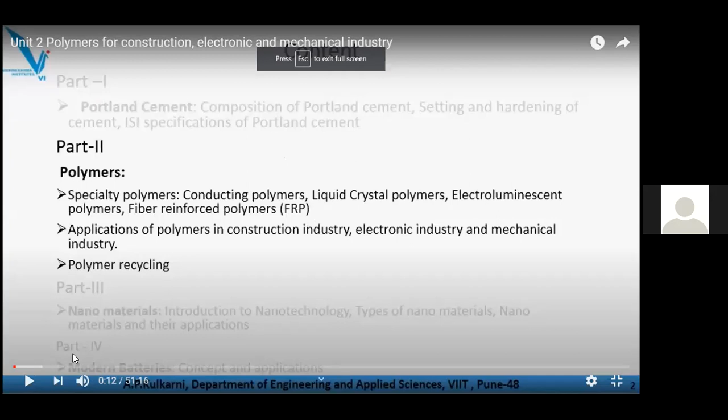Hello everyone. Welcome to lecture number 3 of Unit 2, Chemistry of Engineering Materials. Make it still louder. Just a minute, I'm doing it. This is our senior staff in the VIIT, Aparna Kulkarni ma'am. She has done this recording for everyone. Okay, chalo.

Hello everyone. Welcome to the lecture number 3 of Unit 2, Chemistry of Engineering Materials. We are going to continue our discussion on part 2, that is on polymers. In previous lecture, we had discussed about specialty polymers, that is conducting polymers, liquid crystal polymers, electroluminescent polymers, and fiber reinforced polymers. In this particular section, we are going to consider application of polymers in construction industry, electronic industry, and mechanical industry, along with polymer recycling.

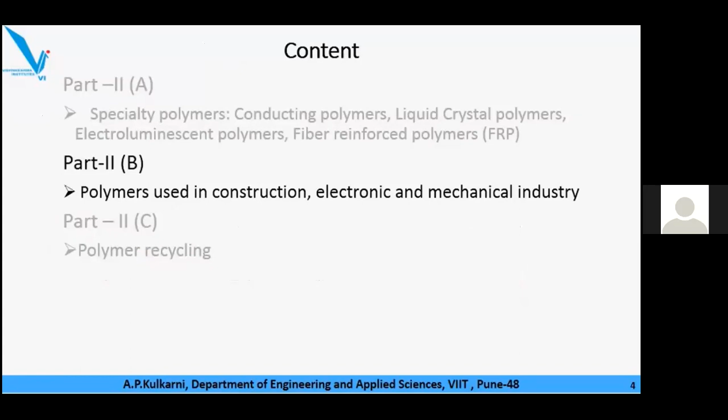So again, if you consider the objective, that is to understand the chemistry and relate it to properties and application. So here we are going to understand chemistry of polymers used in construction, electronic, and mechanical industry. Let's start with polymers in construction industry. Polymer and polymer composites are widely used in structural components in civil engineering fields, building construction, bridges, highways, and expressways, airstrips, helipads, railway, unpaved roads, etc.

The building and construction industry uses a variety of classic building material like metal, glass, wood, and stones. But plastic materials are becoming increasingly important due to their outstanding performance and excellent desirable properties like high strength, low density, and less weight. Construction applications of plastic include pipes and guttering, window and door profiles, roofings,

Excuse me, ma'am. What happened?

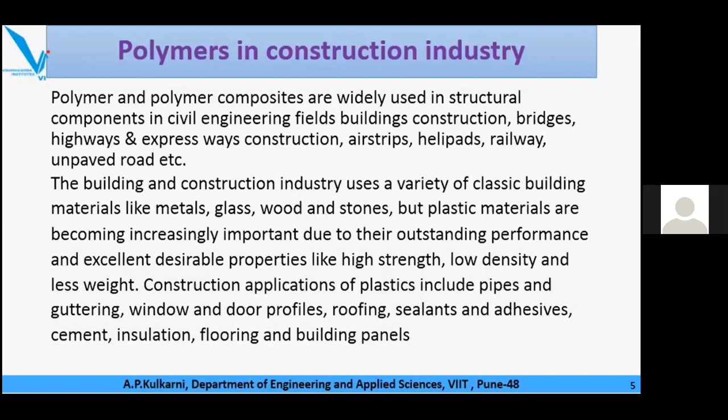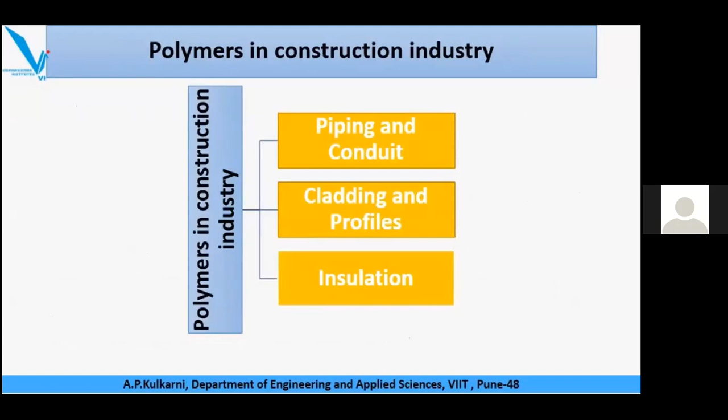Sealants, cement, insulation, flooring, and building panels. Although there are many applications of polymers in construction industry, we are going to focus on three, that is polymers used in piping and conduit, cladding and profiles, and for insulation. Piping and conduit are the largest users of polymers in construction and consume about 35% of production, producing cabling, rainwater goods, large diameter pipes for sewage, drainage, and potable water made from PVC and polyethylene.

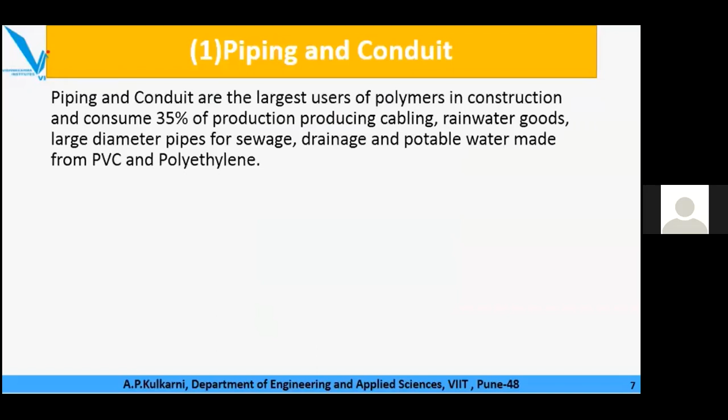So let us see PVC used for pipings and conduits. PVC stands for polyvinyl chloride. Vinyl chloride, that is carbon-carbon double bond with chlorine substitution, on polymerization will give polyvinyl chloride. Why can this be used for piping and conduits? That is because of their properties. The most important properties of PVC are superior fire retardancy, high ignition temperature, and relatively low heat release in burning. It has a high softening temperature, greater stiffness and rigidity as compared to polyethylene, but it is brittle. It presents strong resistance to oxidation, good chemical resistance to acids and alkali chemicals.

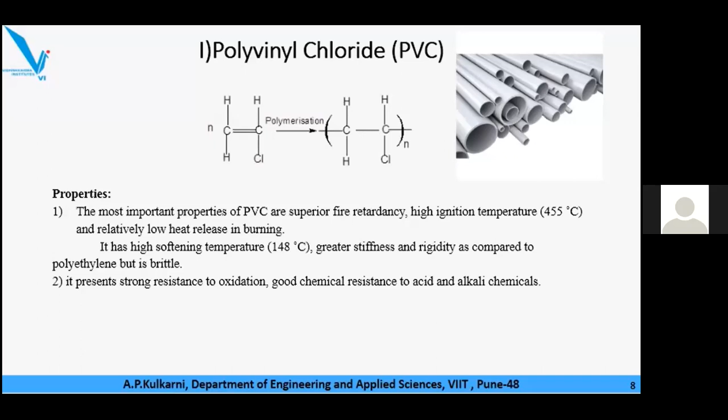Another material for piping and conduit is high density polyethylene, HDPE, where ethylene under low temperature, low pressure condition will produce high density polyethylene using Ziegler-Natta catalyst. Some of the favorite uses of HDPE include low pressure natural gas services, water distribution, and it is used as a lining material in carbon steel pipe. The following properties are responsible for it. High density polyethylene is highly resistant to chemical and corrosion. It has better tensile strength, higher softening temperature.

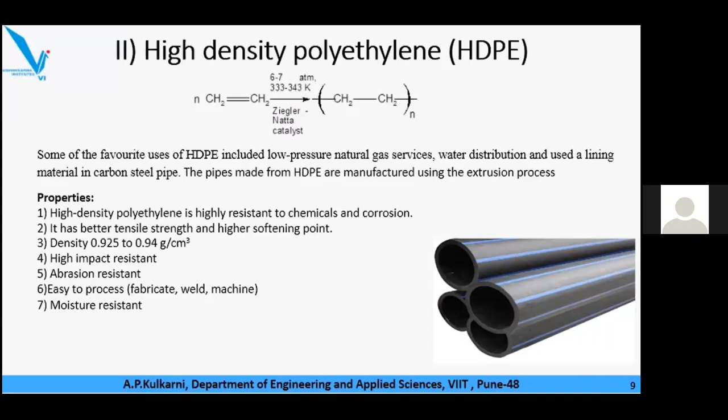The pipes made from HDPE are manufactured using extrusion process. Density is 0.925 to 0.94. High impact resistance, abrasion resistance, easy to process, fabricate, weld and machine, and it is moisture resistant.

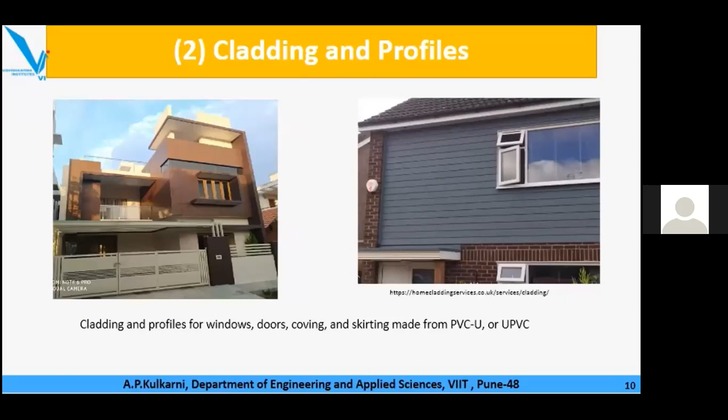Next major application of polymer in construction industry is for claddings and profiles. We observe many times that huge buildings and offices are cladded, and there are architectural profiles built using this plastic material. These claddings and profiles for windows, doors, coving, and skirting are made up of unplasticized PVC, shortly known as PVCU or UPVC.

PVCU or UPVC is called unplasticized PVC. PVC stands for polyvinyl chloride, prepared from polymerization of vinyl chloride. What is the meaning of unplasticized PVC? When these PVC polymer chains are prepared, they are linked to each other by hydrogen bonds. As chlorine is highly electronegative, there will be a minus delta charge on chlorine, and a plus delta charge on hydrogen.

Because of this partial opposite charge, you get a dipole attraction and formation of hydrogen bonds. So unplasticized PVC chains are held very strongly with respect to each other, and that is why we observe very good strength in this unplasticized PVC chain. This reflects on the properties of UPVC, which is highly chemical resistant and used popularly for both residential and commercial purposes. UPVC has excellent chemical resistance, which eliminates formation of limescale and provides good flow characteristics.

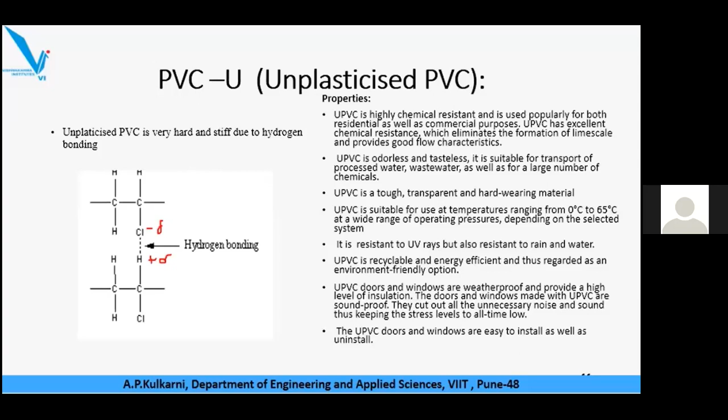UPVC is recyclable and energy efficient, thus regarded as an environment-friendly option. UPVC doors and windows are weatherproof and provide a high level of insulation. They are soundproof, cutting out unnecessary noise, thus keeping stress levels low at all times. UPVC doors and windows are easy to install as well as uninstall.

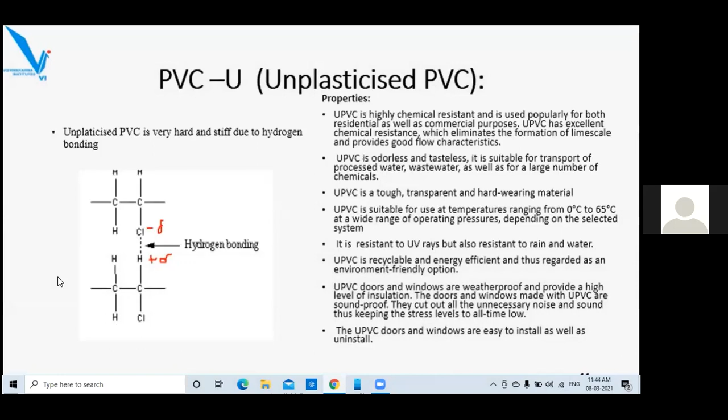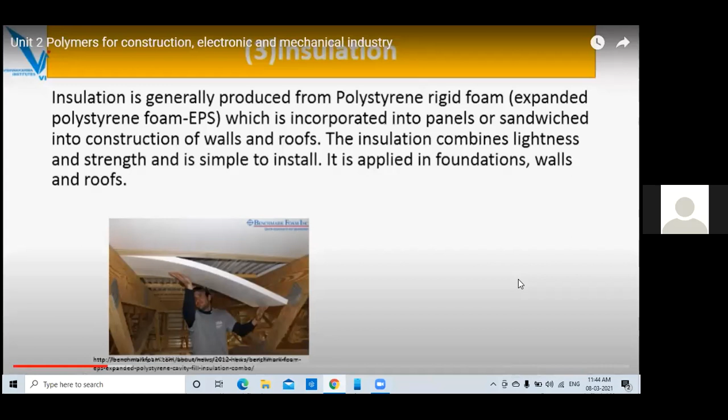Third major application of polymers in construction industry is for insulation. Many times we use galvanized iron sheets as roof sheets, and these get heated up in sun, increasing roof temperature very high. For preventing this, for heat insulation purpose, we use insulation sheets made up of polymer like polystyrene. Insulation is generally produced from polystyrene rigid foam, also called expanded polystyrene foam, shortly EPS, which is incorporated in panels or sandwiched into construction of walls and roofs.

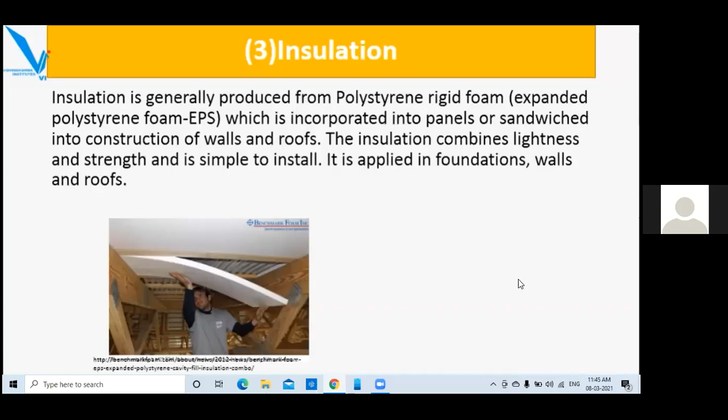Insulation combines lightness and strength, is simple to install, and enables constructors to meet energy conservation regulations. It is applied in foundations, walls, and roofs. Expanded polystyrene foam, EPS, is basically made up of polystyrene, which is prepared from the monomer styrene. Styrene is a carbon-carbon double bond substituted with a benzene ring, and this molecule on polymerization gives us polystyrene.

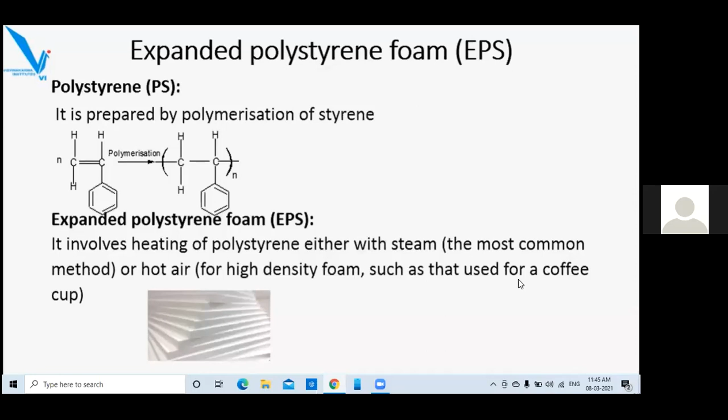What is the meaning of expanded polystyrene foam and how do we get it? This involves heating of polystyrene either with steam, which is the most common method, or hot air for high density foam, such as used for coffee mugs. This EPS foam is the most common in everyday life, seen as white foam in cups for hot beverages, refrigerators, insulation, packaging, etc.

The foam plastic consists of 96 to 98% air and 2 to 4% polystyrene. Granules are heated with steam such that they rapidly expand or foam, forming a low density block in a special form. Insulation foam EPS is used for a variety of applications because of its excellent properties, including good thermal insulation, good damping properties, and being extremely lightweight.

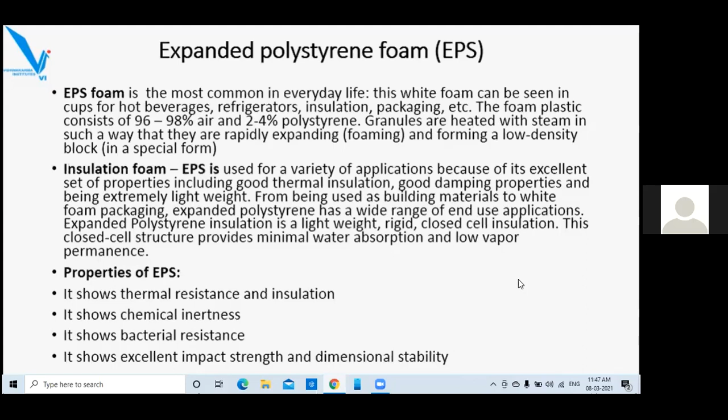From being used as building material to white foam packaging, expanded polystyrene has a wide range of end-use applications. Expanded polystyrene insulation is a lightweight, rigid, closed-cell insulation. This closed-cell structure provides minimal water absorption and low vapor permeance. Its properties include thermal resistance and insulation, chemical inertness, bacterial resistance, excellent impact strength, and dimensional stability.

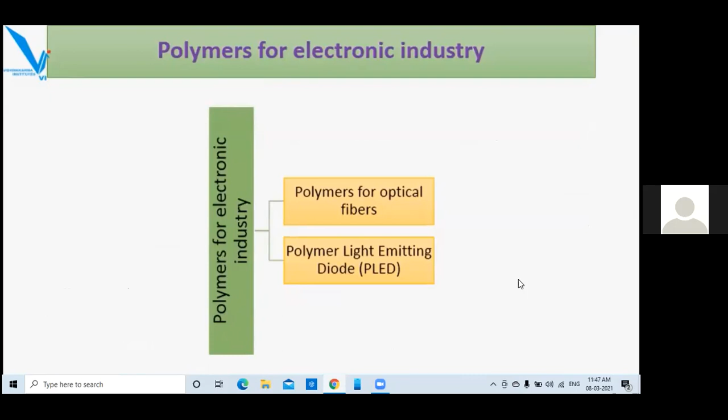Now let us consider polymers for electronic industries. In this category, we are going to consider two: polymers for optical fibers, and polymers used in light emitting diodes.

Let us consider the first one, polymers for optical fibers. In case of electronic communication, information was carried in the form of microwaves and radio waves through copper wires and coaxial cables. But the information carrying capacity of these wires is restricted due to limited bandwidth. If light waves are used instead of radio waves and microwaves, the number of signals transmitted can be increased enormously. Communication using light waves cannot be done directly, but requires some guiding media, normally optical fibers, in which the information carrying light waves could be transmitted.

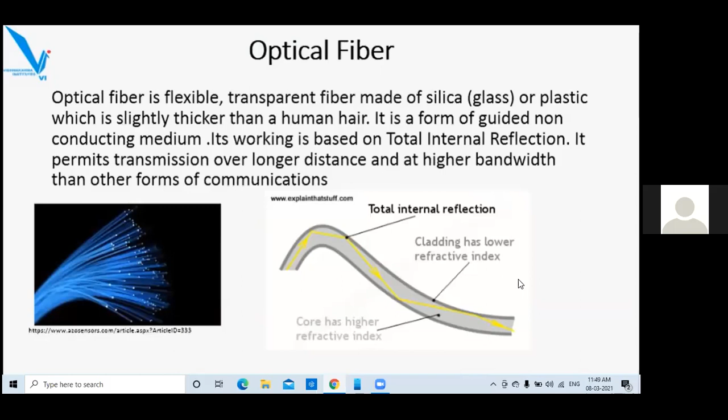Let us understand about optical fibers first. Optical fiber is a flexible, transparent fiber made up of either silica, that is glass, or plastic, slightly thicker than a human hair. It is a form of guided non-conducting medium. Its working is based on total internal reflection. You all have learned in physics about reflection, refraction, and total internal reflection. So in optical fibers, we have total internal reflection of light. That is the basic principle of working of optical fiber. It permits transmission over a longer distance and at higher bandwidth than other forms of communication.

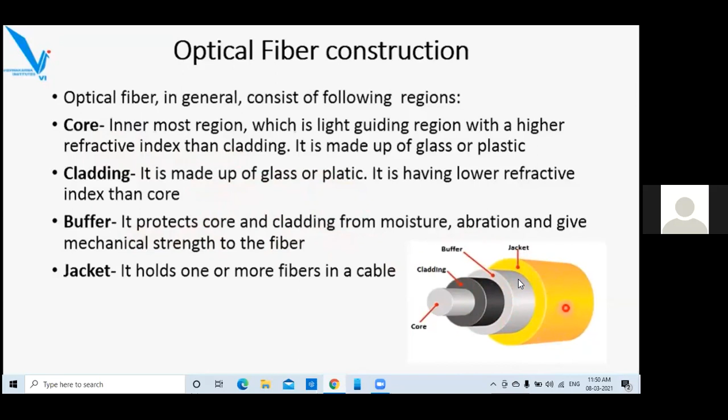Let us understand the general construction of optical fiber. It consists of core, cladding, buffer, and jacket. Core is the innermost region, which is the light guiding region with a higher refractive index than cladding. It is made up of either glass or plastic. Second is cladding, that is covering the core. It is made up of glass or plastic, and has a lower refractive index than the core. Then we have buffer, the third layer, which protects core and cladding from moisture, abrasion, and gives mechanical strength to the fiber. Lastly, we have the jacket, which holds one or more fibers in the cable.

Now let us understand about polymer optical fibers, shortly called POF. Polymer optical fiber is made up of polymer that transmits light for illumination or for data transfer. This light can be utilized through the polymer core. So in this case, the core of the optical fiber is made up of polymer. Polymer optical fibers are made up of low-cost plastic materials such as polymethyl methacrylate, shortly called PMMA, polystyrene, polycarbonate, with their transmission windows in the visible range, that is 500 to 800 nanometer. So it is extremely important that the polymers selected should be highly transparent and the transmission window should be in the visible range, ranging from 500 to 800 nanometer.

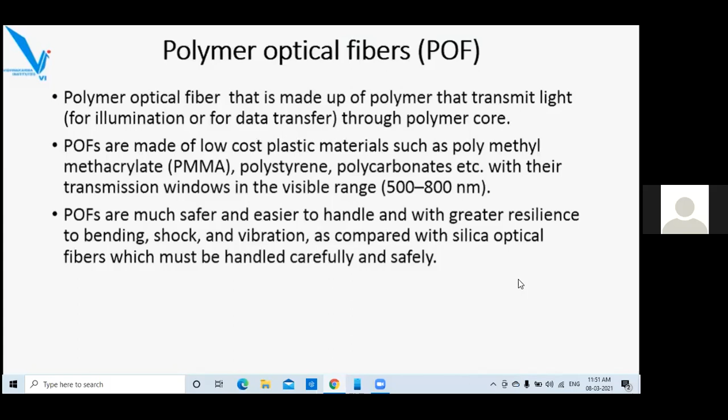POFs are much safer and easier to handle, with greater resilience to bend, shock, and vibrations as compared to silica optical fiber, that is glass optical fibers, which must be handled very carefully and safely because it contains a glass core. For long distance links where attenuation and dispersion effects are of prime importance, glass fiber core optical fibers are going to be superior.

However, polymer optical fiber is advantageous for short distance networks which are less concerned with attenuation and more concerned with flexibility, hazard-free handling, and low-cost installation. For short distance applications, multi-mode optical fiber with large core size is preferred over single mode fiber. Conventional multi-mode silica glass fiber cannot have a large core size because a large fiber becomes very brittle and inflexible.

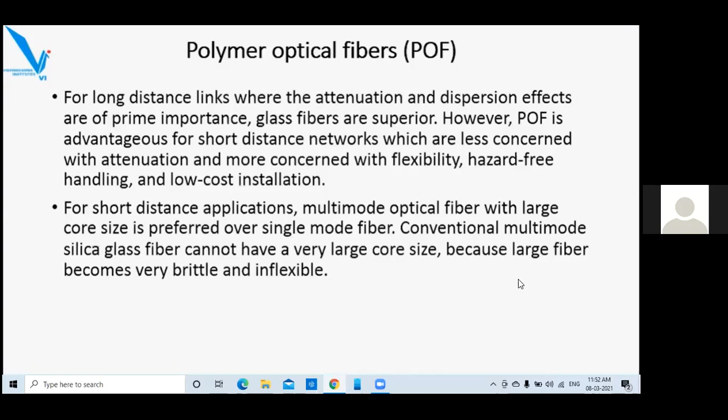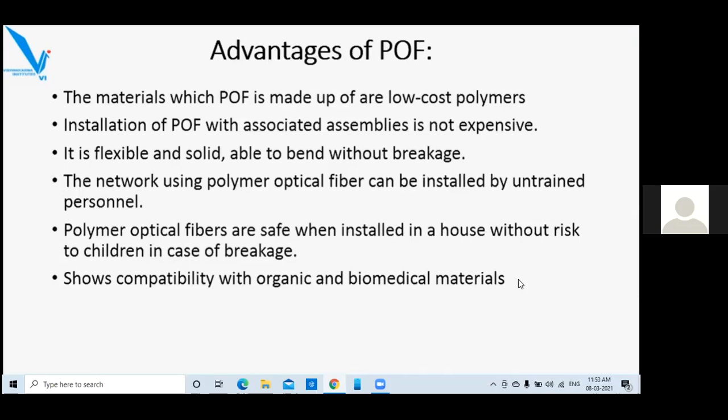So what are the advantages of polymer optical fibers? The materials which POF is made of are low-cost polymers. Installation of polymer optical fiber with associated assemblies is not expensive. It is flexible and solid, able to bend without breaking. Networks using polymer optical fiber can be installed by untrained personnel. Polymer optical fibers are safe when installed in-house, without risk to children in case of breakage, and show compatibility with organic and biomedical materials.

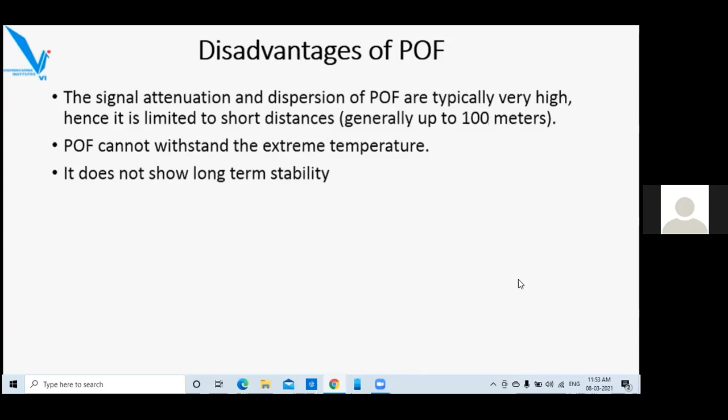At the same time, it shows certain disadvantages: the signal attenuation and dispersion of polymer optical fibers are typically very high, and hence it is limited to short distance, generally up to 100 meters. Polymer optical fibers cannot withstand extreme high temperature and do not show long-term stability. When it comes to applications of polymer optical fibers, it is normally used for lighting for decoration purposes, inspection of mechanical welds in pipes and engines, aeroplanes, rockets, automobiles, etc.

Medical applications such as endoscopy, bronchoscopy, laparoscopy, and communication use optical fibers. In communication, it is used for short distance network purposes. For sensors, it is used for optical measurement of flow. Biosensors measure fluorescence produced by biological activity, which is collected and transmitted by fiber.

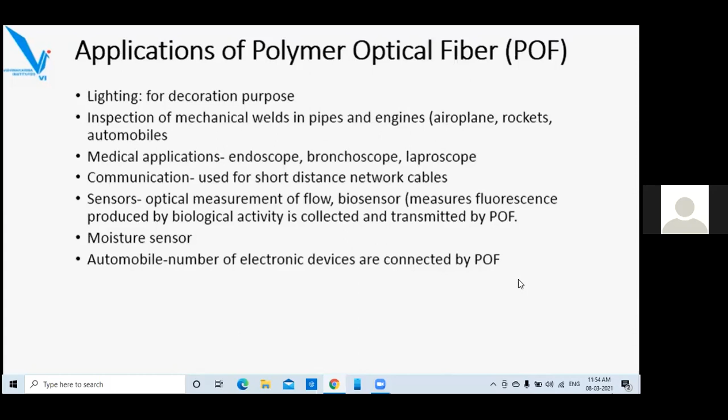This can also be used in moisture sensors. It is used in automobiles for a number of electronic devices that are connected by polymer optical fibers. If we compare these polymer optical fibers with glass fibers, then...

Polymer optical fibers are less expensive, while glass optical fibers are more expensive. Polymer optical fibers cannot sustain extreme temperature, whereas glass can sustain higher temperature. Polymer has better signal strength, whereas glass fiber has poorer signal strength.

Polymer is used for low speed, short distance applications, whereas glass fibers are used for longer distance transmission with higher speed. Polymer optical fibers are used in car networks, home networks, and industrial networks, whereas glass fibers are used in underground data transmission systems.

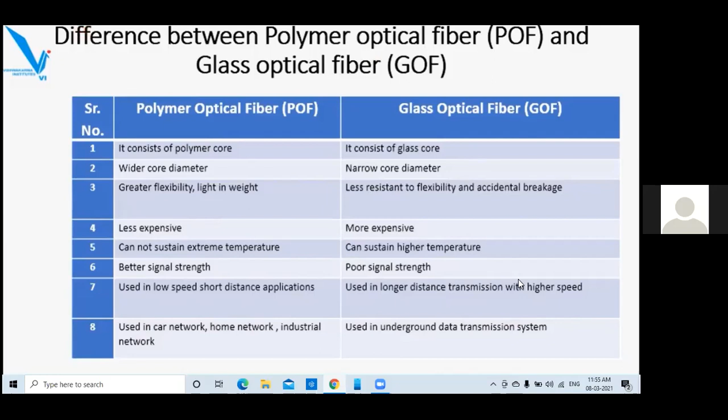So major networking is done by glass optical fibers, but when it comes to household networking systems or industrial networking systems, we can make use of polymer optical fibers, which are safer to use, can be easily bent, and have less accidental injury chances. So after looking at what optical fibers are and how differently the materials can be used, let us understand the materials used in the core material of polymer optical fibers.

Materials used for polymer optical fibers should have the following characteristics. Number one, it should be clear plastic with good optical transmission quality for efficient optical transmission. Number two, it must be flexible and must be able to be drawn into long fibers.

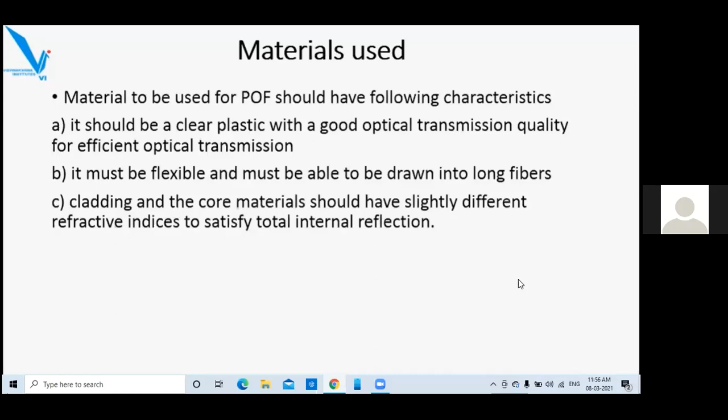Number three, the cladding and core material should have a slight difference in refractive index to satisfy total internal reflection. Let us consider the first material, polymethyl methacrylate, shortly called PMMA.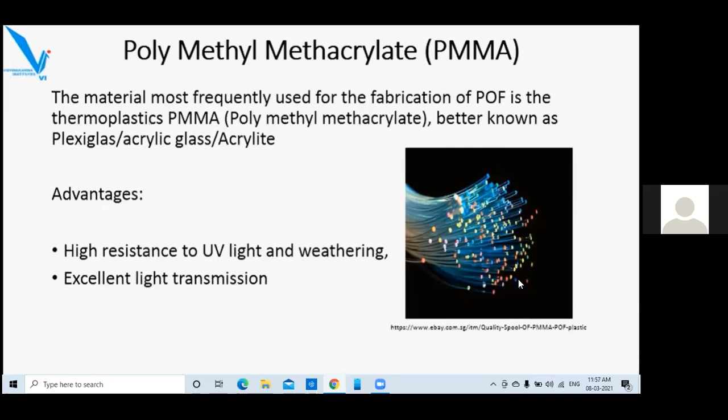The material most frequently used for fabrication of POF is thermoplastic polymethyl methacrylate, better known as plexiglass, acrylic glass, or acrylite. Advantages of this material are high resistance to UV light and weathering, and excellent light transmission. Polymethyl methacrylate is a polymer formed by polymerization of the monomer methyl methacrylate.

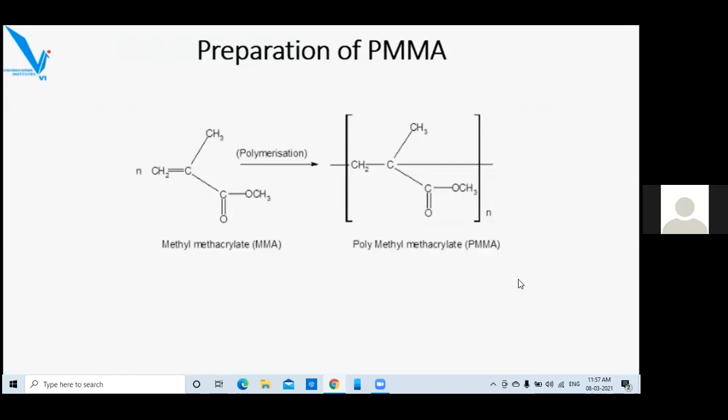By opening of the double bond, the monomers link to each other to form a long polymer chain of polymethyl methacrylate. Polymethyl methacrylate is used as a core with refractive index 1.49.

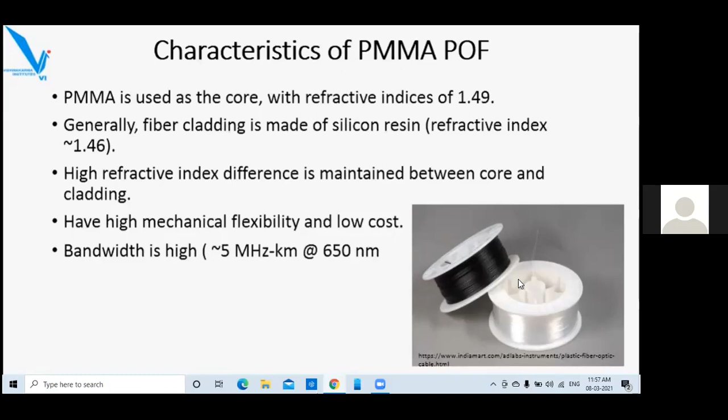Generally, the fiber cladding is made up of silicone resin, which has a slightly lower refractive index of 1.46. A high refractive index difference is maintained between core and cladding. This PMMA polymer optical fiber has high mechanical flexibility, low cost, and very high bandwidth, about 5 megahertz kilometer at about 650 nanometers.

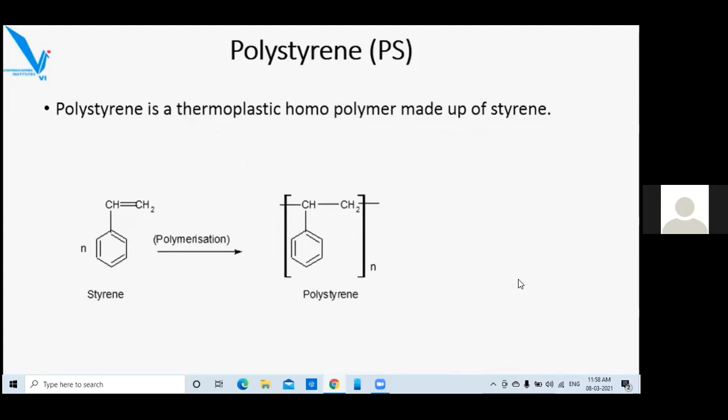The second material used here is polystyrene. Polystyrene is a thermoplastic homopolymer made up of styrene. Polystyrene is used as a core with refractive index 1.59.

Generally, the fiber cladding should have a lower refractive index, so we can use silicone resin with a refractive index of 1.46 or polymethyl methacrylate with a refractive index of 1.49. Since polystyrene is transparent, inexpensive, and available in large quantity, its use as a polymer optical fiber seems profitable.

Although PS fibers have advantages like decreased water uptake, a higher refractive index of 1.59, and theoretically lower attenuation limit between 600 to 700 nanometer wavelength compared to polymethyl methacrylate polymer optical fibers, their commercial success is limited. The mechanical characteristics and superior chemical resistance of polymethyl methacrylate might be responsible for this.

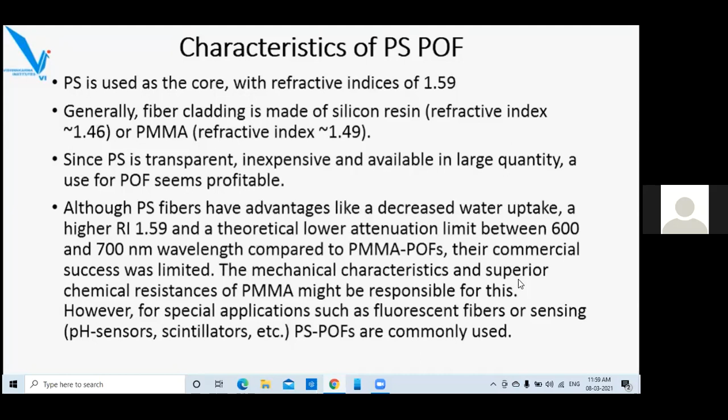However, for special applications such as fluorescent fibers or sensing materials like pH sensors and scintillators, polystyrene polymer optical fibers are commonly used. Fluorescent optical fibers made up of polystyrene are used for archery and gun sights, as well as crafts and hobbies.

The fiber is made from polystyrene surrounded by a clear acrylic plastic, that is polymethyl methacrylate. Special fluorescent dyes are added to the core where they absorb UV light and emit visible light. Light is refracted within the core and is reflected to the ends.

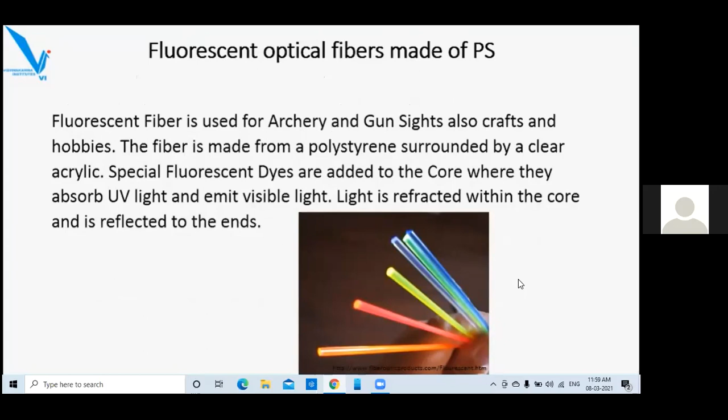So why is this PPV used as a material for light emitting diode? PPV has very low intrinsic electrical conductivity, about 10^-13 Siemens per centimeter. The electrical conductivity increases upon doping with iodine, ferric chloride, alkali metals. We have seen about P doping and N doping, so the same applies over here. PPV is water insoluble, but its precursor can be manipulated in aqueous solution, so that becomes easy to apply. It gives a bright yellow-green fluorescence on application of electric field.

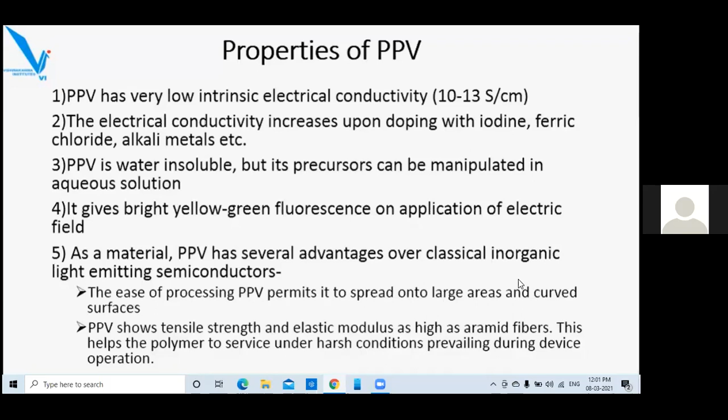As a material, PPV has several advantages over classic inorganic light emitting semiconductors. Number one, the ease of processing of PPV permits its spread onto large area and curved surfaces. PPV shows tensile strength and elastic modulus as high as aramid fibers. This helps the polymer to serve under harsh conditions prevailing during the device operation.

Normally this PPV is going to give us yellow-green light. But if you want other colors, then derivatives of PPV can be used as the middle layer. Due to stability, processability, and electrical and optical properties, PPV is used in organic light emitting diode, that is OLED. So this device, based on PPV as an emissive layer, emits yellow-green fluorescent light. For different colors, derivatives of PPV can be used.

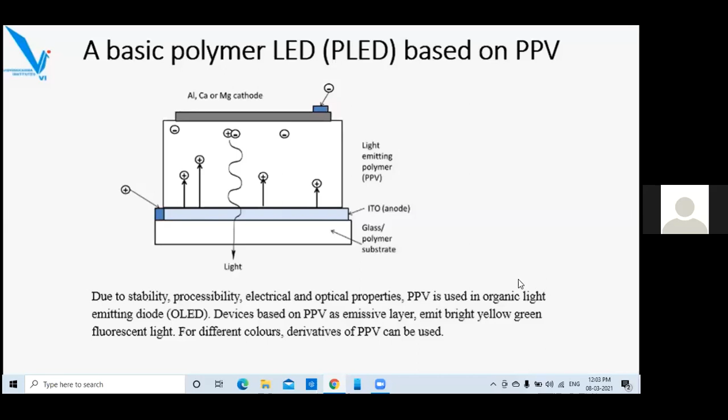Now let us consider polymers for mechanical industry. We are going to consider two applications. Actually mechanical industry is a vast industry, and in many applications polymers are getting used. But we have focused on two industries which are very commonly considered for polymer applications, and that is polymers for automobiles, and a very recently expanding industry, that is 3D printing industry. So we will be considering the use of polymers in 3D printing.

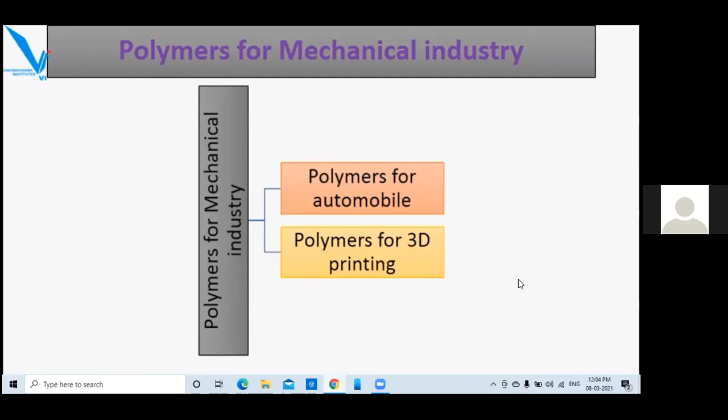Let us first consider polymers for automobiles, and in that the first category is polycarbonate. Polycarbonate is normally made up of two different materials, that is bisphenol A, two phenol molecules connected by a carbon which has methyl substitution. This is then polymerized with diphenyl carbonate. It's a condensation polymerization, and it forms a polycarbonate chain. This amorphous polycarbonate polymer offers a rare combination of stiffness, hardness, and toughness.

It shows excellent weathering, creep, impact, optical, electrical, thermal properties, and UV resistance, with transparency levels almost as good as acrylic. Acrylic plastics normally undergo yellowing, but polycarbonate has less tendency to yellow, and therefore for its excellent transparency characteristics, it can be used in bumpers, headlamps, lenses, security screens, aircraft panels, etc.

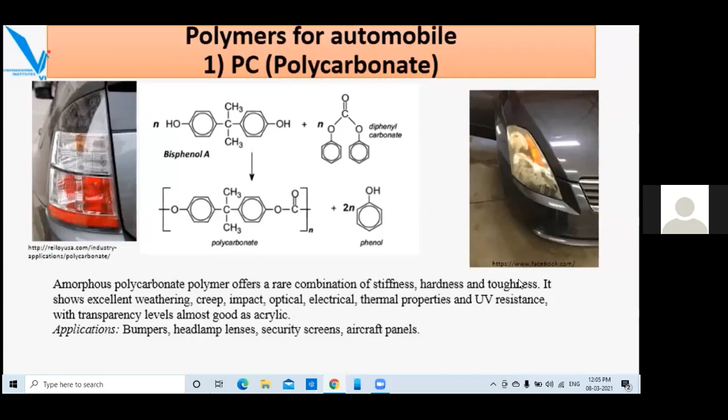Next we have ABS, which stands for acrylonitrile butadiene styrene plastic. This is a copolymer, or we can say a tricopolymer, because three monomers are involved in it: acrylonitrile, butadiene and styrene. They open up their double bonds and get linked to each other. As you know, butadiene, after opening its two double bonds, gives one double bond in between. So with the three different monomers linked to each other to form polymers, this is a copolymer, and since three are involved, we call it a tricopolymer.

Acrylonitrile butadiene styrene tricopolymer is a durable thermoplastic. It is a copolymer built by polymerization of styrene and acrylonitrile in presence of polybutadiene. The styrene gives the plastic a shiny and impervious surface. Butadiene, a rubbery substance, provides resilience at low temperature. A variety of modifications can be made to improve impact resistance, toughness, heat resistance, weather and chemical resistance. Applications: the polymer can be used for automobile body parts, dashboards, wheel covers, manufacture of housings, covers, and linings.

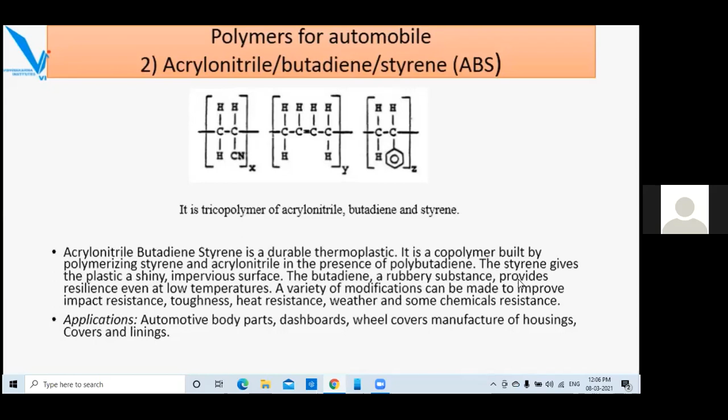Next, we have use in automobile industry, that is polyamides, that is nylon 6,6, nylon 6. You have already learned this preparation in 12th standard. That is, nylon 6,6 is prepared from adipic acid and hexamethylene diamine. Nylon 6 is prepared by caprolactam, forming polycaprolactam. Then common polyamides such as nylon 6,6 or nylon 6 can be used for this.

It is a general purpose nylon that can be both molded and extruded. Nylon 6,6 has very good mechanical properties and wear resistance. They are frequently used when a low cost, high mechanical strength, rigid and stable material is required. They also absorb water easily, and components in wet or humid conditions will expand.

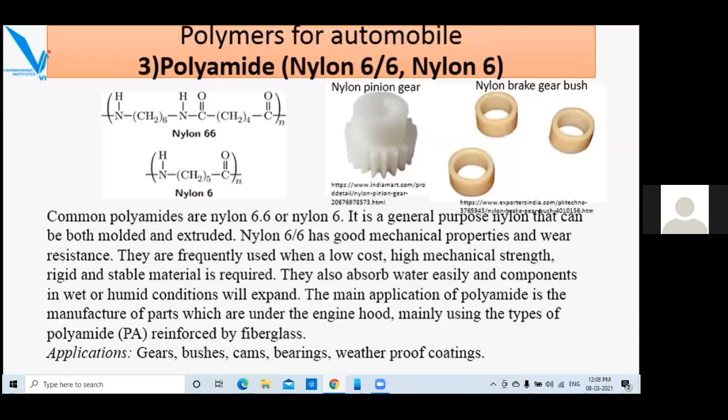The main application of polyamide is the manufacture of parts which are under the engine hood, mainly using types of polyamide reinforced by fiberglass. So these are mainly getting used in gears, bushes, cams, bearings, weatherproof coatings, etc.

Next, we have PVC, that is polyvinyl chloride, which is made up of vinyl chloride. This is a material used in automobile industry for manufacture of protection for the bottom floor in the car, for internal lining and coating of electrical cables in vehicles. Polyvinyl chloride can be molded in various ways such as injection molding, compression molding, blow molding to form a huge variety of products, either rigid or flexible. That depends upon the amount and the type of plasticizers we use.

In the earlier case for construction industry, we have considered unplasticized PVC, where we are taking PVC after manufacturing as it is. So if you remember, in PVC chains we have hydrogen bonding. So when we use certain chemicals which can weaken this hydrogen bonding, then the polymer, that is PVC, which was earlier very hard and stiff, now becomes soft. And such soft PVC can be used for a variety of applications in automobile, which is flexible in nature.

Okay. Now, the chemical which is used for weakening this hydrogen bond is called a plasticizer. And the amount of plasticizer will decide how much flexibility we can bring, because the more plasticizer, the more hydrogen bonds will be broken.

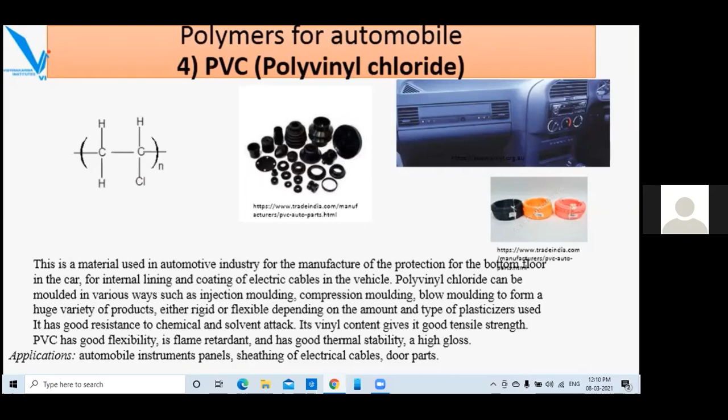So when we consider this plasticized PVC, it has a very good resistance to chemical and solvent attack. Its vinyl content gives a good tensile strength. PVC has good flexibility. It's flame retardant and has good thermal stability with a high gloss. And this can be applied in automobile instrument panels, sheathing of electrical cables and door parts.

Next we have polyurethane. Polyurethanes are normally made by reaction of diisocyanate with diols. Diols or sometimes polyols, that is, where the number of hydroxyl groups in the monomer is more than 2, this is considered as polyols. So as shown in this particular reaction, we may have polyurethane linkages with the NH-C=O linkage. These polyurethanes are a large family of polymers with a wide range of properties and uses, all based on the reaction products of organic isocyanate with compounds containing hydroxyl groups.

So it depends upon which type of diisocyanate we are choosing and which type of polyalcohol or diol we are choosing. Polyurethanes may be thermosetting or thermoplastic. That again depends upon the raw material which we are using for polymer preparation. So it really depends upon which type of isocyanate and which type of alcohols we are using for preparation of polyurethanes. Principal applications are in coatings, elastomers, foams, etc. Polyurethane

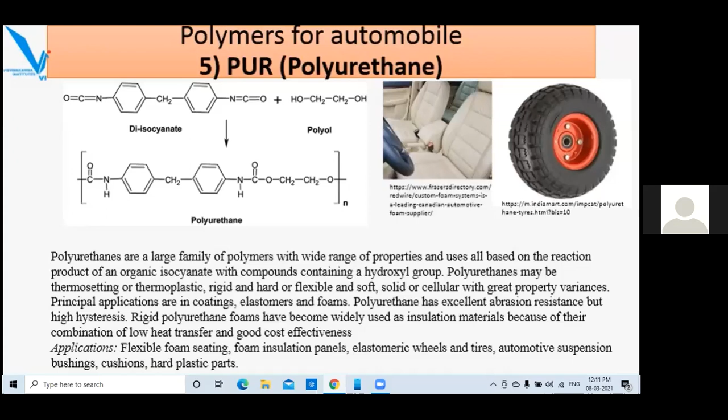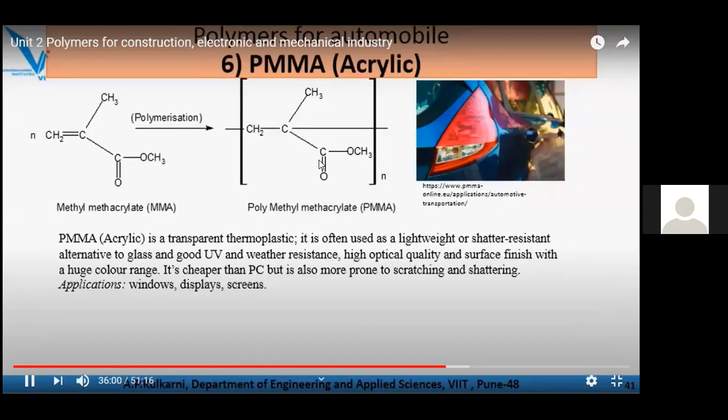Polymethyl methacrylate, that is acrylic plastic, which is made up of methyl methacrylate. We have already discussed about this reaction. Polymethyl methacrylate or PMMA is a transparent thermoplastic material. It is often used as a lightweight and shatter resistant alternative to glass and has good UV and weather resistance.

So high optical clarity is a basic property of polymethyl methacrylate, as you have already learned under polymer optical fibers, where the core can be made up of polymethyl methacrylate. It has also got a good surface finish with a huge color range. It is cheaper than polycarbonate, but it's more prone to scratching and shattering. So polymethyl methacrylate is mostly used in light windows, displays, and screens.

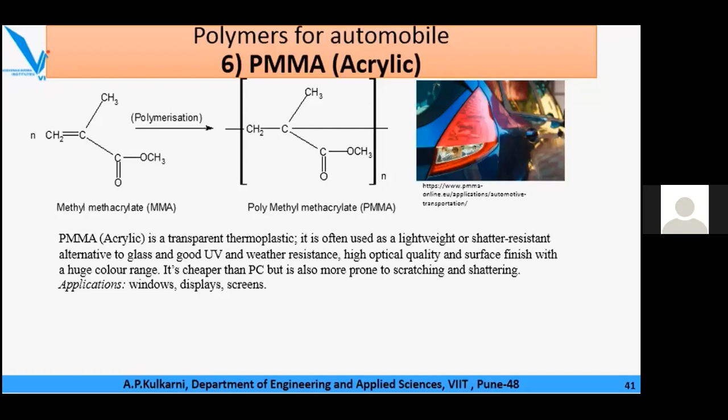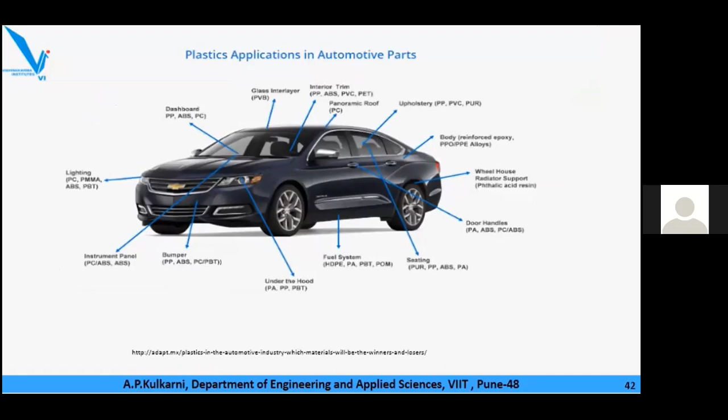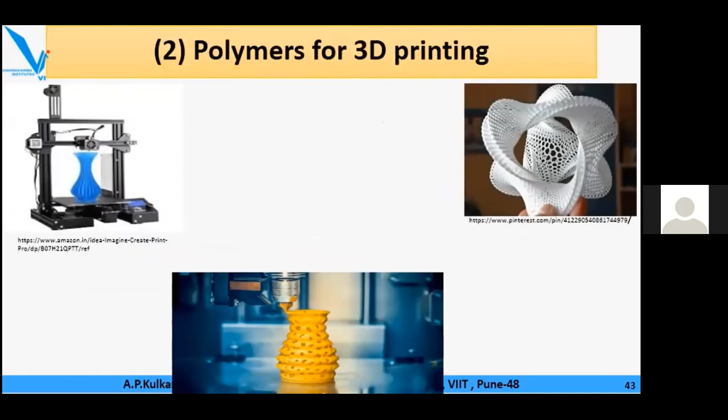This particular picture is just to indicate how different polymeric materials are getting used in different parts of an automobile, especially a car. Next category of mechanical application we are having is polymers used for 3D printing. Let us first understand what is called 3D printing. 3D printing technology is an emerging additive manufacturing technology.

Now, for the normal manufacturing process for any product, we are using subtractive manufacturing technology. That is, suppose I want to have a sheet fitted to some machine, then I'll take a plain sheet, then I'll cut the corners as per the requirement. I'll cut that sheet into a particular size. Then I'll make 4 holes for screwing and then fit that sheet into the particular machine part. So this is called a subtractive technology because I am going to subtract material in order to fit into that particular product component.

So when we consider additive manufacturing, it is something different: we'll be designing that particular product according to our requirement and then just get it done by adding the material part by part and getting the parts compiled in the required design. So 3D printing is one of them, where the material is printed according to our requirement. 3D printing is called an additive manufacturing technology because we are not removing any part from it. Instead, layer by layer, we add material and make that component.

So 3D printing technology is an emerging additive manufacturing technology that enables the design and rapid manufacturing of materials with complex microstructure. Developments in 3D printing have allowed manufacturing companies to expand from design and 3D printing of prototypes to the rapid manufacturing of end products. Additive manufacturing enables the manufacturing of components in layer by layer fashion, opposite to common manufacturing methods that rely on machining and molding, that is subtractive methods, to obtain the final product.

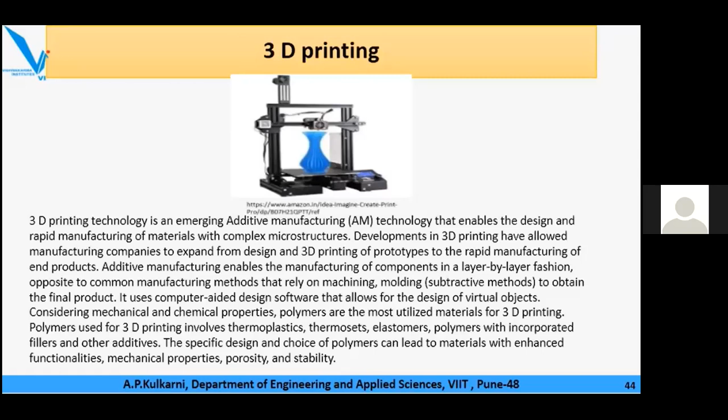It uses computer-aided design software that allows for the design of virtual objects. Considering mechanical and chemical properties, polymers are the most used materials for 3D printing. Polymers used for 3D printing involve thermoplastics, thermosets, elastomers, and polymers with incorporated fillers and other additives. So just like we have considered fiber reinforced plastic, FRP, such FRP materials can also be used for 3D printing. The specific design and choice of polymer can lead to materials with enhanced functionalities, mechanical properties, porosity, and stability.

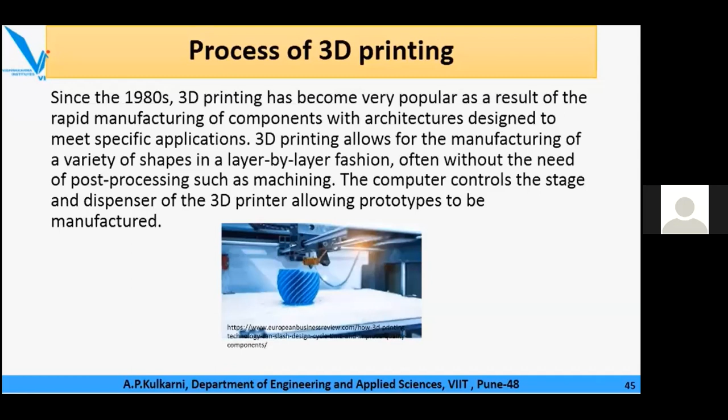Now let us consider the process of 3D printing. Since the 1980s, 3D printing has become very popular as a result of rapid manufacturing of components with architectures designed to meet specific applications. 3D printing allows for manufacturing of a variety of shapes in layer by layer fashion, often without the need for post-processing such as machining. The computer controls the stage and the dispenser of the 3D printer, allowing prototypes to be manufactured.

Now let us understand what type of polymers are used in the 3D printing industry. Polylactic acid, that is PLA, polycarbonate, that is PC, acrylonitrile butadiene styrene, that is ABS plastic, polyether ether ketone, that is PEEK, and nylons are common polymers that are processed by heating to a semi-liquid state close to their melting point, so that we can put them layer by layer in this molten state, and then after cooling this is solidified into that particular object.

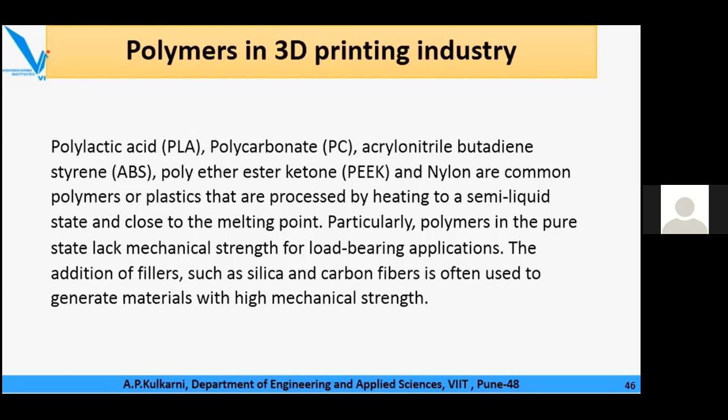Particularly, polymers in the pure state lack mechanical strength for load-bearing applications. The addition of fillers such as silica, carbon fibers, etc. is often used to generate materials with high mechanical strength. Let us understand the first material used for 3D printing, that is ABS, acrylonitrile butadiene styrene. As discussed earlier, it's a tricopolymer.

That is, it is made up of three different types of monomers: acrylonitrile, that is a carbon double bond substituted with cyanide, then butadiene, and then styrene. The double bonds get opened up and they get linked to each other to form this tricopolymer. This thermoplastic polymer is called a terpolymer or tricopolymer, and is obtained most often by polymerization of acrylonitrile and styrene in presence of polybutadiene. Generally 20% acrylonitrile, 25% butadiene, and 55% styrene.

Manipulating these proportions can therefore modify the properties of ABS. Styrene, for example, is the element that gives ABS rigidity and brilliance, while butadiene gives impact resistance and low temperature properties.

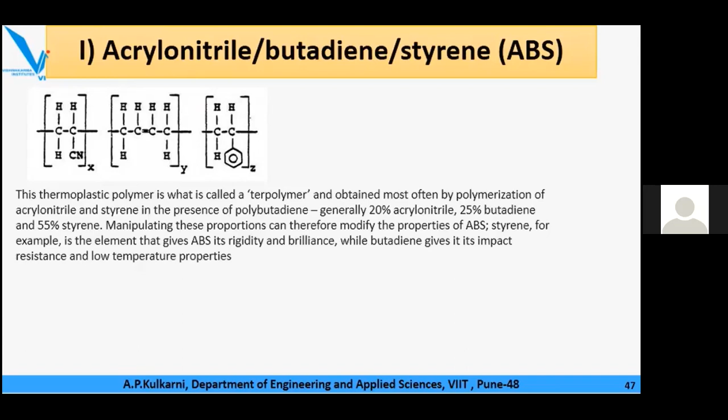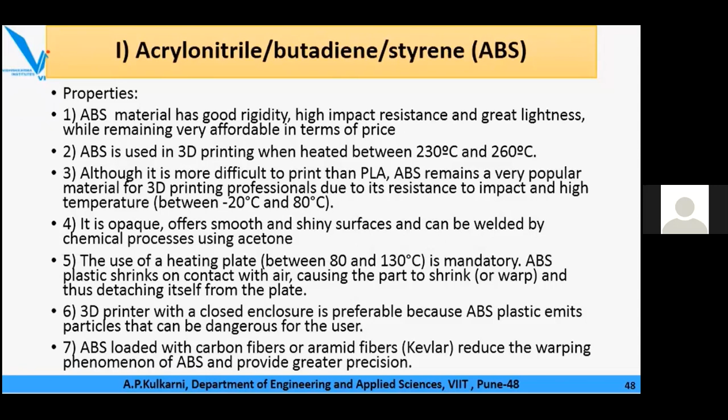The use of a heating plate between 80 to 130 degrees Celsius is mandatory because ABS plastic shrinks on contact with air, causing a part to shrink or warp and thus detach itself from the plate. A 3D printer with a closed enclosure is preferable because ABS plastic emits particles that can be dangerous for the users. ABS loaded with carbon fibers or aramid fibers, that is Kevlar, reduces warping phenomena of ABS and provides greater precision.

Another very popular material used for 3D printing is polylactic acid. Polylactic acid, PLA, is also known as polylactide. It is a thermoplastic made from renewable sources such as cornstarch, tapioca roots, or sugar cane by fermentation, unlike the industrial materials made primarily from petroleum.

In this case, the natural product is ground to separate the starch from corn, mixing it with acid or lactic monomers. With this mixture, the starch is broken into dextrose, that is D-glucose or corn sugar, and finally this glucose on fermentation produces lactic acid, the basic component of PLA, that is polylactic acid.

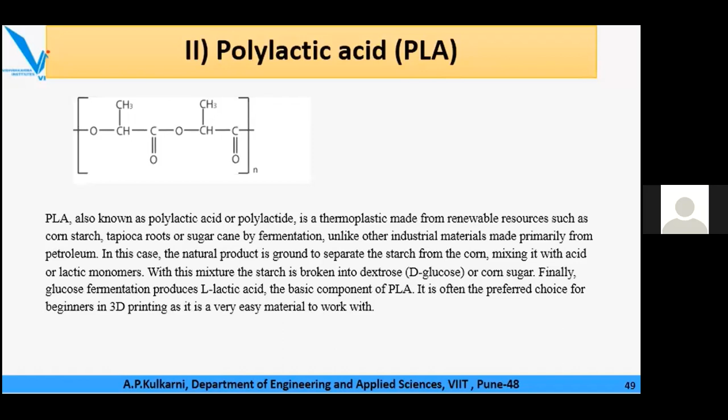PLA is one of the easiest materials to print, though it does have a tendency to shrink slightly after 3D printing, therefore it does not require a heated platform when printing in PLA, unlike ABS. PLA also prints at a lower temperature than ABS, that is between 190 to 230 degrees Celsius.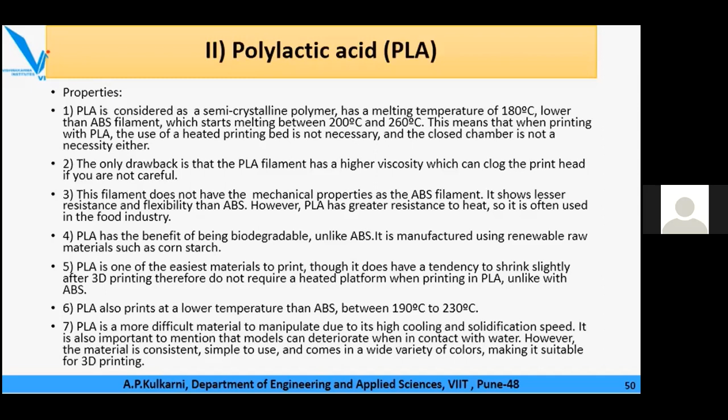PLA is a more difficult material to manipulate due to its high cooling and solidification speed. It is also important to mention that models can deteriorate when in contact with water. However, the material is consistent, simple to use, and comes in a wide variety of colors, making it suitable for 3D printing.

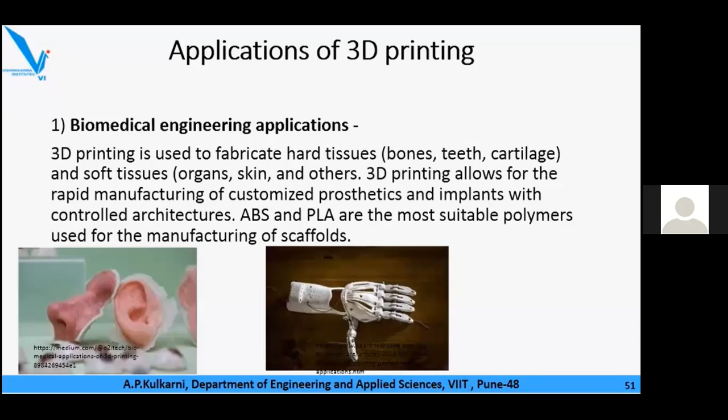So if you consider these polymers which are used in 3D printing, their general applications can be in biomedical engineering. 3D printing is used to fabricate hard tissues like bones, teeth, cartilage, and soft tissues like organs, skin, etc. 3D printing allows for rapid manufacturing of customized prosthetics and implants with controlled architectures. ABS and PLA are the most suitable polymers used for manufacturing of scaffolds.

In the aerospace industry, applications typically require lightweight and high-strength material. The aerospace industry has replaced the conventional manufacturing methods of molding and machining with 3D printing technology for small-scale production. The main use of 3D printing has been focused on prototyping, modeling, and producing jigs, fixtures, and tools.

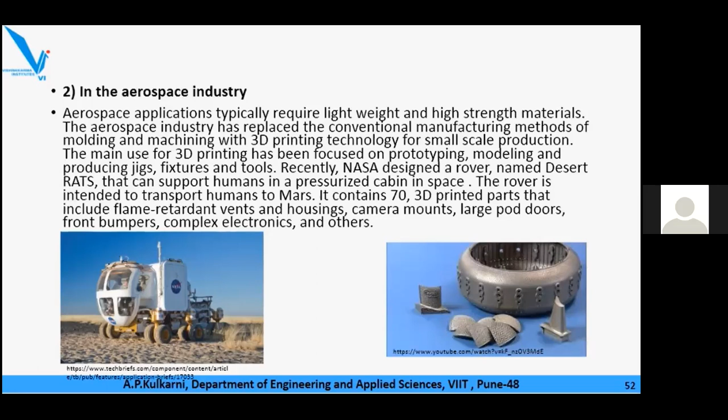Recently, NASA designed a rover named Desert RATS that can support humans in a pressurized cabin in space. The rover is intended to transport human beings to Mars, and it contains about 70 3D printed parts that include flame retardant vents and housings, camera mounts, large pod doors, front bumpers, complex electronics, and others.

In electronics, 3D printed components can also be used. Electronic devices require suitable mechanical, geometrical, and optical functionalities to allow for miniaturizing, low energy consumption, and smart capabilities. The conventional method for manufacturing electronic devices uses subtractive methods that involve masking and etching of materials. 3D printing is being used to substitute these steps for mounting and assembling electronic devices.

The additive process of 3D printing deposits material in a controlled layer by layer manner, allowing the manufacturing of complex geometries and dimensions. Along with miniaturization, 3D printing allows the manufacturing of small parts that would otherwise be very difficult to obtain. 3D printing has found applications in thin films, inductors, solar cells, and others. The most common 3D printing techniques for electronics are inkjets and direct writing conductive inks.

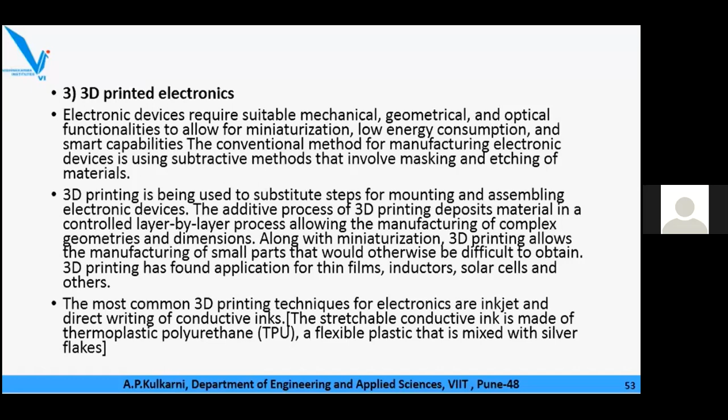We have seen polymers and polymer composites that are widely used in structural components in civil engineering fields, building construction, bridges, highways, expressways, airstrips, helipads, railway, and unpaved roads. For piping and conduit, we have seen PVC and HDPE. For cladding and profiles, we have considered unplasticized PVC, whereas expanded polystyrene for insulation.

For electronic industries, we have considered polymers for optical fibers and polymers for light emitting diodes. Polymer optical fibers were compared with glass fibers. Advantages and disadvantages of POF are discussed. Optically clear polymers like polymethyl methacrylate and polystyrenes are discussed for use in optical fibers. PPV based organic LED or polymer LED construction and the mechanism is discussed.

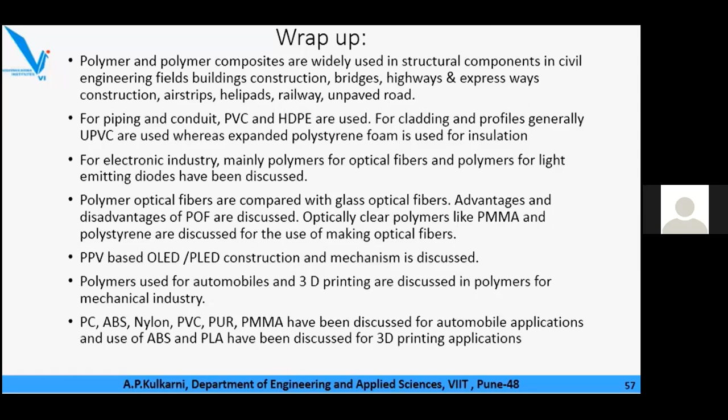Polymers used for automobiles and 3D printing are discussed in polymers for the mechanical industry. PC, that is polycarbonate, ABS, nylon, PVC, polyurethane, polymethyl methacrylate have been discussed in automobile applications, whereas ABS and PLA, that is acrylonitrile butadiene styrene and polylactic acid, have been discussed in the 3D printing section.

So we are going to discuss polymer recycling and nanomaterials. Polymer recycling is the part left from the polymer part, that is part 2, and then it will be followed by part 3, that is nanomaterials.